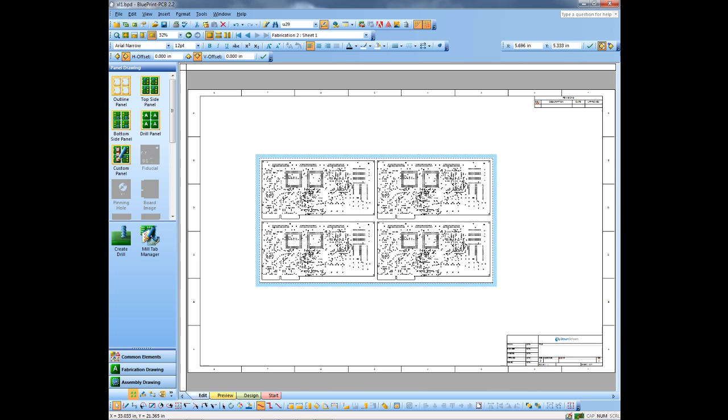We'll now format the panel and decide upon what spacings, how big the panel is, and so forth.

In this particular case, I'm going to add what they call rails to the sides, so we're adding a little extra space off to the sides. I'm not going to have any space at the top and bottom. I'm going to put 100 mils in between the boards here, and that tells me I'm going to get a panel of this size.

It's fairly large for an array panel, but we'll go ahead and use it for our demo purposes here. I can lock the panel boards in their locations, which makes sure that I don't accidentally move them when I'm actually working on the boards themselves.

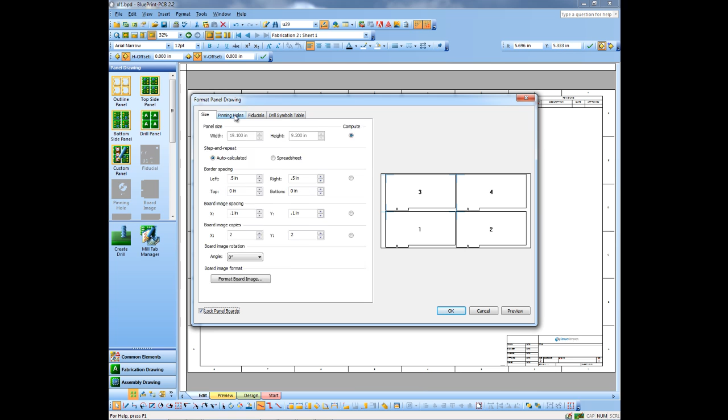I can add pinning holes, and I just need to specify the locations, so we'll use the relative mode here. It makes it a little easier. And you can see a small preview of that pinning hole there.

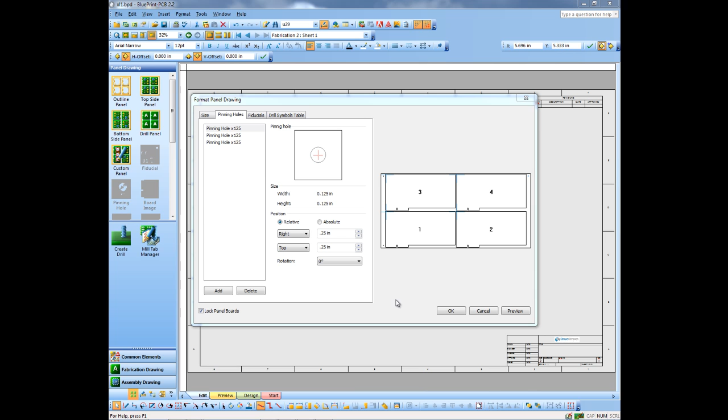To save a little time in the video, I went ahead and added 2 more pinning holes. Now I'm going to add fiducials in the same manner. So I choose the fiducial that I want to add, and then just choose the location that I'd like to put it at.

And again, you get a small preview of it. Now that I've placed my pinning holes and fiducials, we'll go ahead and let them populate here on the design.

And we're ready to start editing our design. So once again, I'm going to right click and go to Edit Panel.

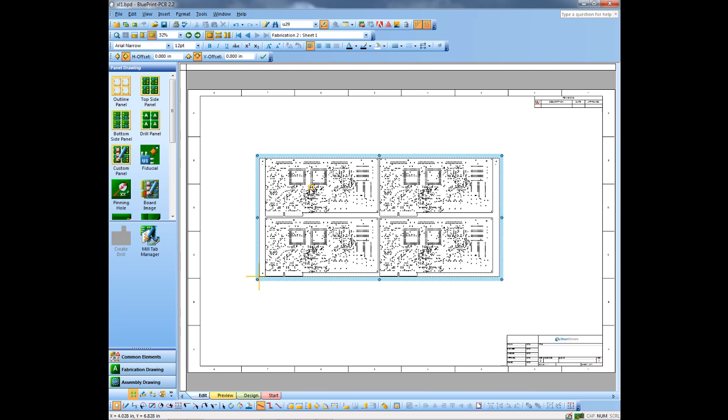Now as you notice, this design has fingers, so I want those pointing outward so they can be gold plated. So I'm just going to select those and transform them, flipping them vertically so that the fingers are pointing out.

Next thing I'm going to do is come down to this lower left board, and I'm going to add a web route to it. And then let's zoom in to that.

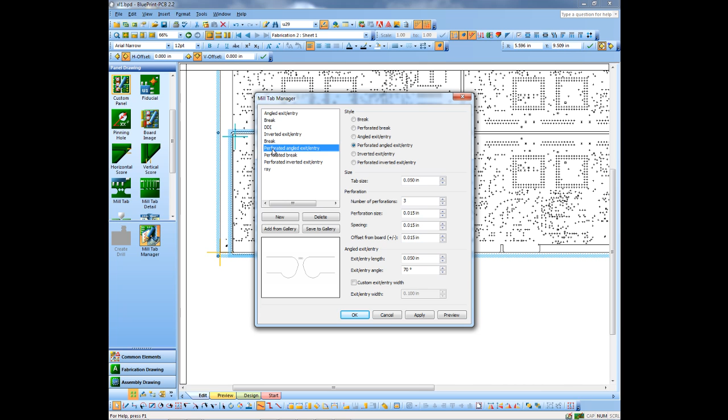To that web route, I'm going to add some mill tabs. We do have a mill tab manager where you can create your own mill tabs, various styles that people use. I've already created one that we use here in our company and saved it off to the library, so I just drag and drop it to place it where I want to. And I'm going to place a few of these.

You could be more accurate with this if you want to, or you can even zoom in on it, and if you want to adjust it a little bit, just slide it to the exact location that you want to. And because it is BluePrint, I could have copper layers turned on and see if I'm coming anywhere close to copper when I'm placing these mill tabs.

The next thing I'm going to do is copy these mill tabs from one side of the board to the other. So I'll use the offset copy command to do that. I'll show you the first one, then do the rest to save a little time. So basically I just decide how far I want to copy it. It's just the size of our board here.

And just click OK, and it copies it to the top of the board. So I've now copied my mill tabs around one board.

I'm going to select them all, copy the web route parameters, and then select the rest of the boards in this panel.

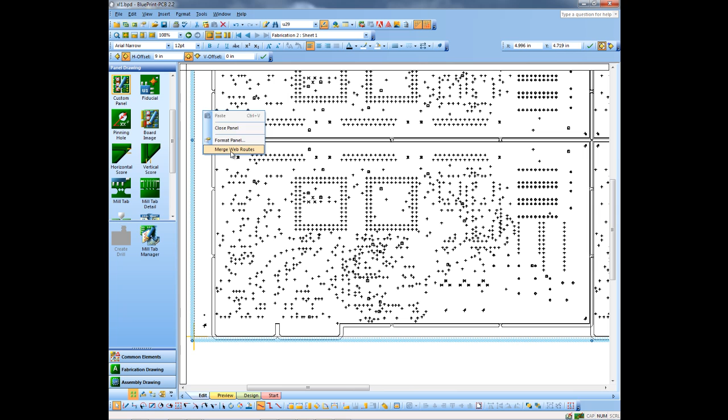Once I've selected them all, I'm just going to apply those web route parameters to all the boards in this panel. Then the last step is I'm going to merge web routes so that any material that would be dropped off during the milling process will actually drop off on my drawing. And what I end up with is a panel drawing with milled areas open here, mill tabs between the designs, and fingers at the edge of the design.

Let's finish off our drawing with some of the more common things that you might add to a panel drawing. We'll zoom out again here.

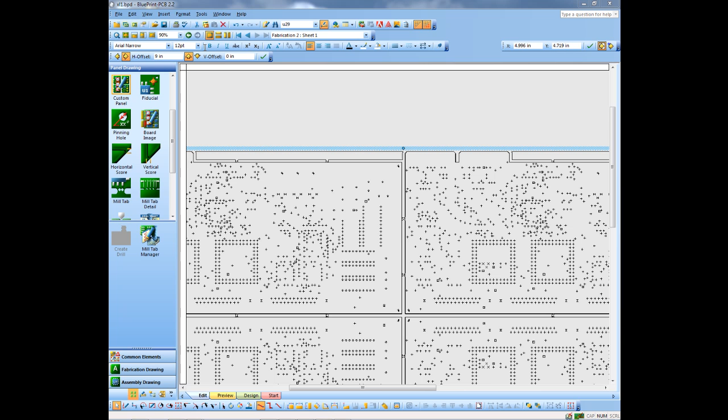Let's go ahead and add a mill tab detail. So we placed our mill tabs, but now we want to show the detail for the mill tab that we added. So we can simply just select it, and we'll zoom in on it here, and as you can see, we went ahead and dimensioned it for you so you don't have to do all the dimensions.

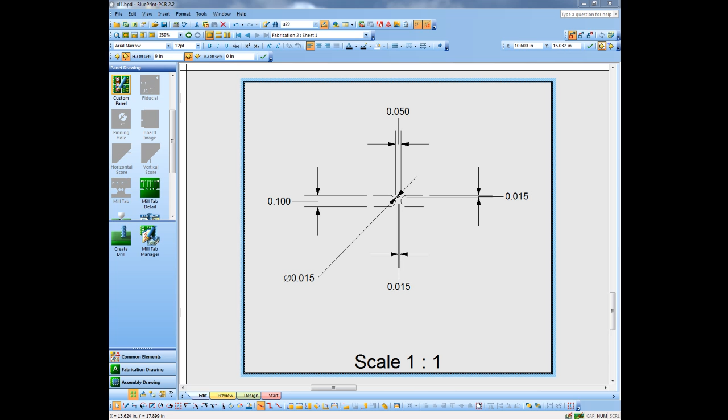The next thing we might add would be a drill chart. So we'll go ahead and do the same thing there. We'll just drag and drop a drill chart over here.

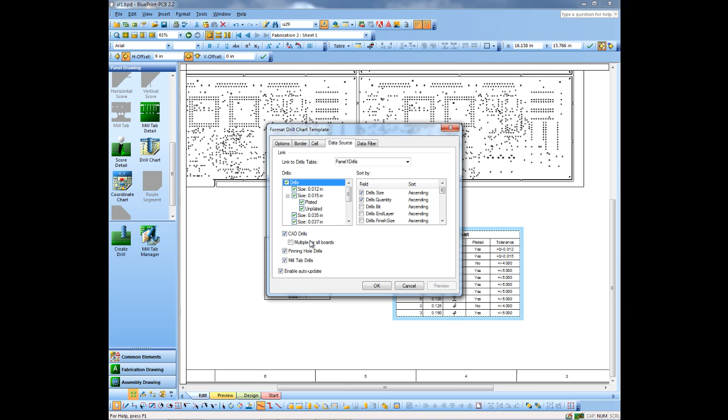At first, the drill chart defaults to showing all the drills, but we may want to show just the drills on this panel drawing. So of course, we have the controls for doing that in BluePrint, and we'll just go ahead and select the pinning holes and mill tab drills only, and just show those in our chart.

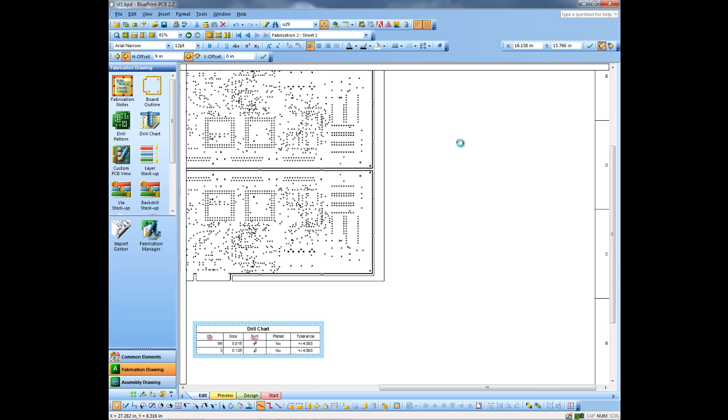One more thing we might add to our drawing might be some notes, some fabrication notes. So we'll go back to our fabrication drawing palette and just drag and drop some notes. Now I could have different notes here, or many different sets of notes, and one of them could be specifically for panel drawings.

So let's zoom out a little bit here, and really the only thing left to do to this drawing, and we would be done with it, is dimension the actual drawing itself.

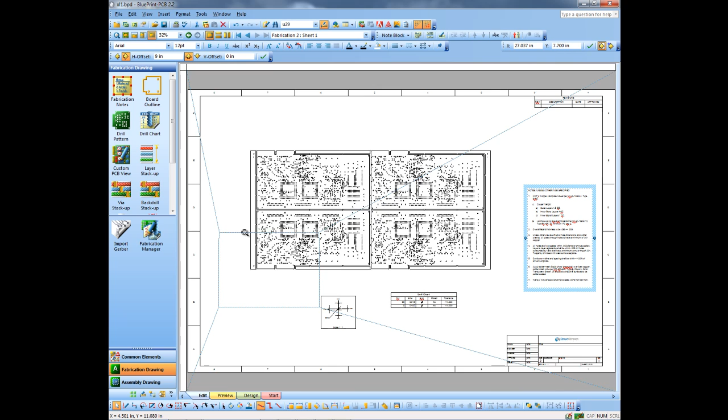So let's zoom in here on our tooling hole and our breakaway, and let's do datum dimensioning. So we'll add a datum point there, and we'll add a datum point in the other axis, and now we'll just simply drag and drop dimensions.

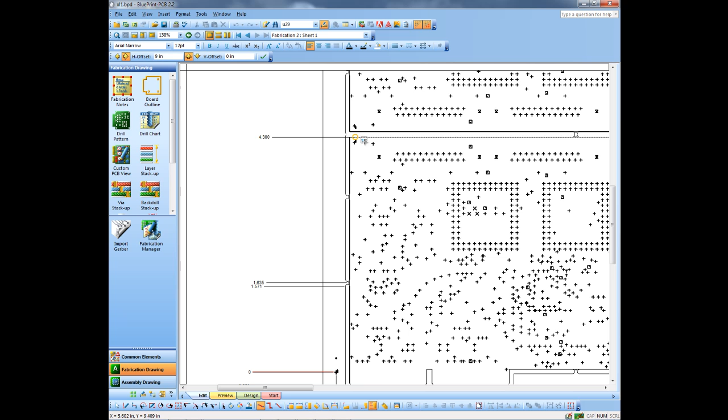We can do mill tabs, we can do routes, the edge of the board, we can do any hole on the board. Of course, we can do the fiducials that we added, we can do the other drill, the top edge of the board, and just as simple as that, we went ahead and added dimensions to our design.

So as you can see, it's pretty easy to add dimensions. That's pretty much all we would need to do to our panel drawing.

So very quickly you are able to create panel drawings in BluePrint PCB. Thank you for your time.